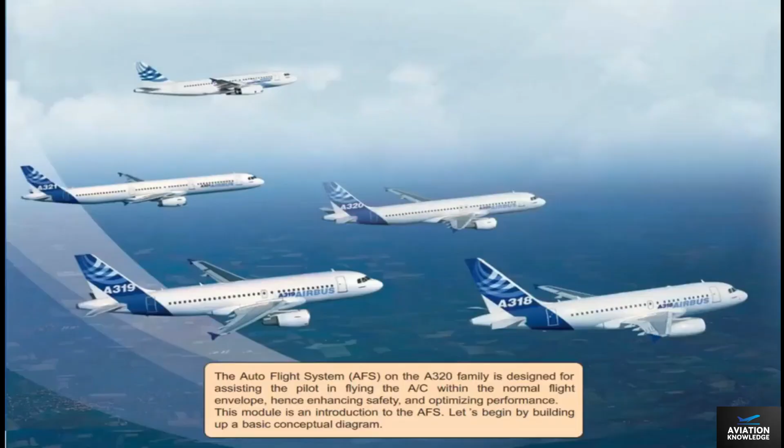The Auto Flight System, AFS, on the A320 family is designed for assisting the pilot in flying the aircraft within the normal flight envelope, hence enhancing safety and optimizing performance.

This module is an introduction to the AFS. Let's begin by building up a basic conceptual diagram.

The AFS could be represented as 4 main sections. At the heart of the system is a computation and processing section, the brain. The central processing section has access to several information sources. The pilots have access to the central processing section via input devices. Finally, after computation and processing, commands are provided to output devices.

For the AFS in the A320 family, computation and processing are done by 2 flight management guidance computers, FMGCs. The 2 FMGCs are identical and normally work together, so for training purposes we will group them as the Flight Management Guidance System, FMGS.

The FMGS receives navigation information, which contains details of airfields, nav aids, airways, routes, waypoints, procedures, SIDs, stars, approaches, missed approaches, etc. Aircraft performance information, the Air Data and Inertial Reference System, ADIRS, and the Global Positioning System, GPS, for position and dynamic information. You will learn about them in the navigation chapter. The clock, radio navigation information.

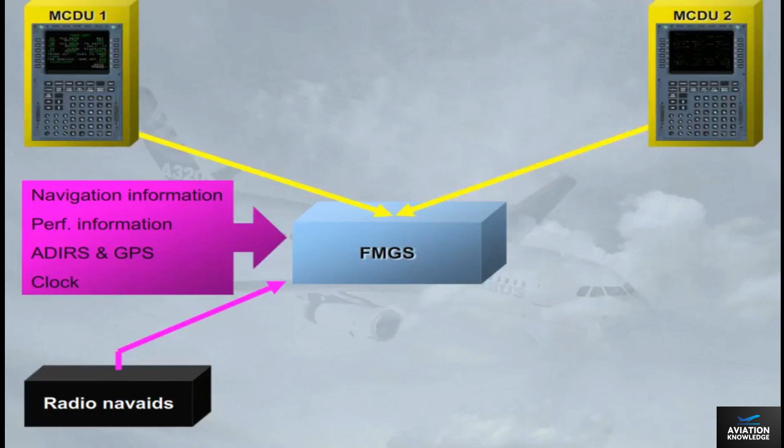The pilots provide inputs to the FMGS using 2 multipurpose control and display units, MCDU, for long-term interventions, and a single flight control unit, FCU, for short-term interventions.

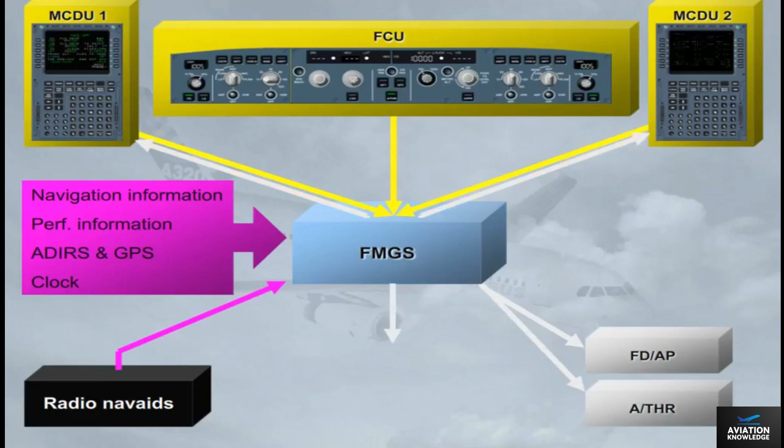The FMGS provide outputs to the flight directors, FDs, and autopilots, APs, for pitch, roll, and yaw control, the autothrust, ATHR, for thrust control, the MCDUs and EFIS for the display of information, and the navigation radios for the automatic tuning of radio aids.

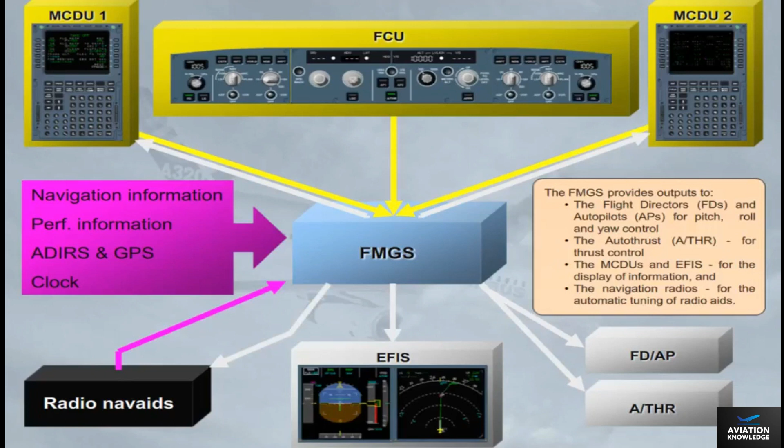The FMGS is divided into 3 main parts: flight management, flight guidance, flight augmentation.

The flight management part of the FMGS controls the following functions: navigation, the position of the aircraft and the estimated accuracy of this position; flight planning, the flight plan computation; performance optimization, costs, speeds, and altitude optimization.

Predictions, the accurate estimates for waypoints, altitudes, speeds, fuel, destinations, and alternates; display management, the control of information to the EFIS system to display auto flight modes and navigation information.

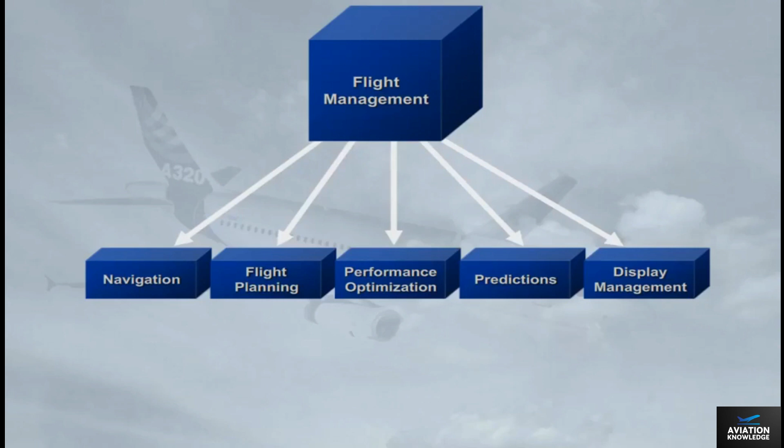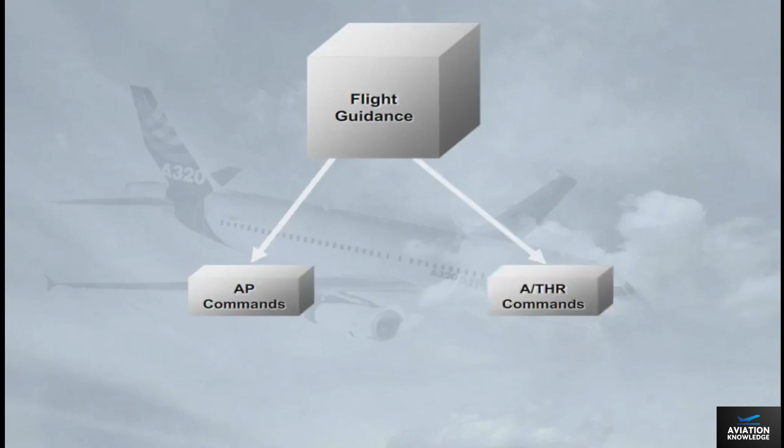The flight guidance part of the FMGS provides autopilot commands to automatically control pitch, roll, and yaw, auto thrust commands to automatically control thrust, flight director commands for the pilot to control the pitch, roll, and yaw.

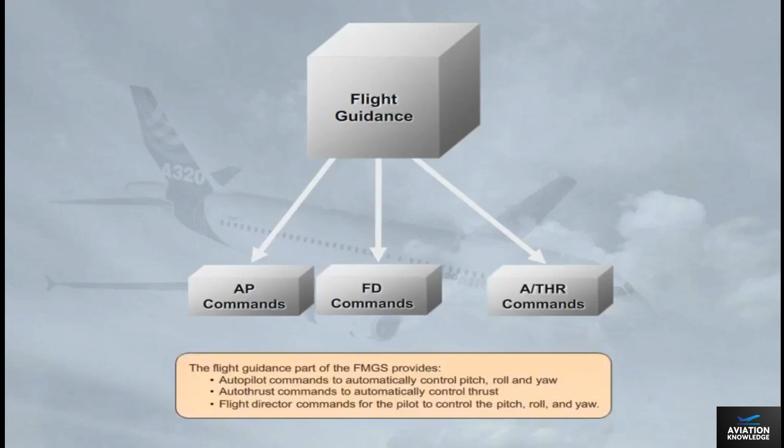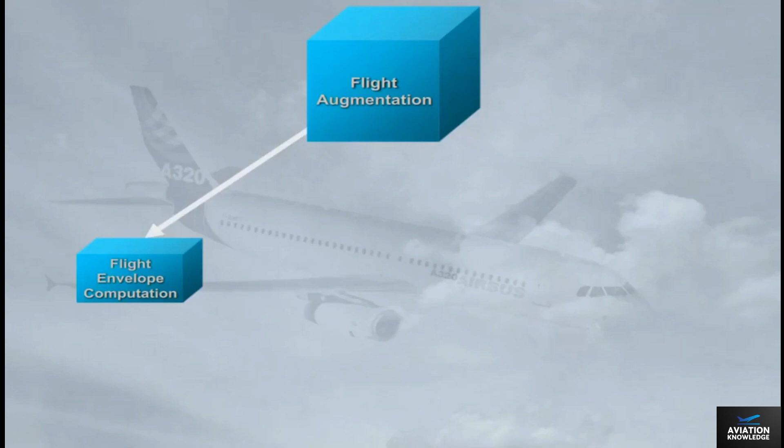The flight augmentation, FAC, part of the FMGS provides flight envelope computations, minimum speed, such as VLS, or maximum speed, such as VMO or VFE. Maneuvering speed computation, for example best speed to fly in a given flap configuration.

Wind shear detection, which triggers the wind shear warning. Angle of attack protection, alpha floor protection, triggered when the aircraft's angle of attack is above a predetermined threshold.

Note, the FAC has various yaw functions, such as yaw damping, turn coordination, and others which will be reviewed in the Flight Controls chapter.

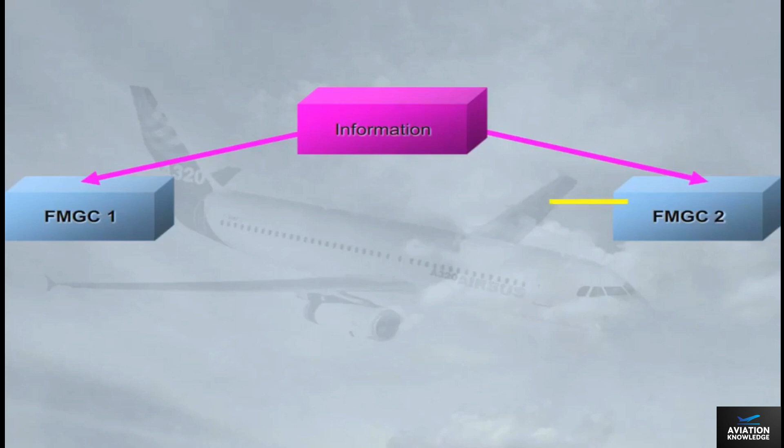As a general rule, the two FMGCs have access to information provided by onside sensors, except for certain parameters or in case of failures. They exchange information for validity comparison purposes.

For example, information from MCDU-1 is received by FMGC-1 and transmitted to FMGC-2. All FMGCs and MCDUs are then synchronized.

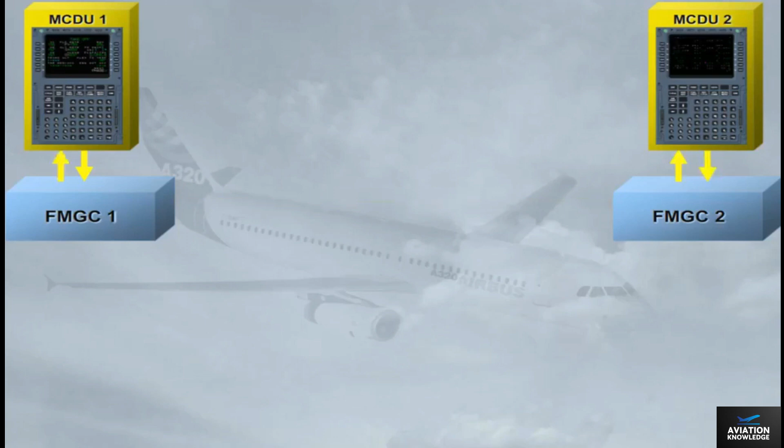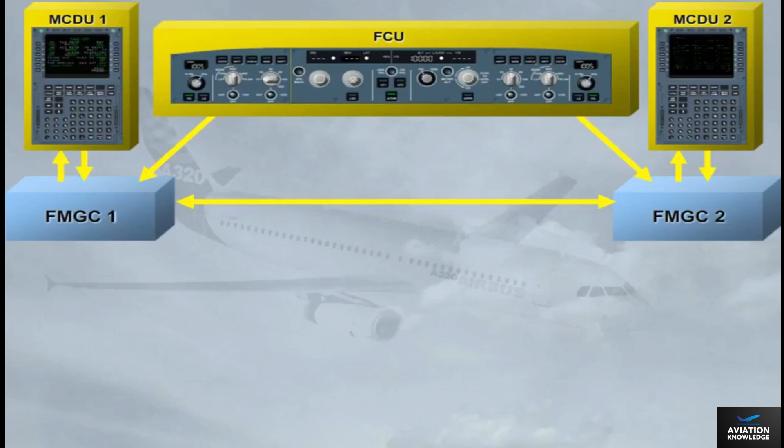The inputs from the FCU are fed to both FMGCs. Both FMGCs send their commands to the FDs, the autopilots, and the autothrust system.

According to a given internal logic, one FMGC is declared master. E.g., if autopilot 1 is on, FMGC 1 is master. Amongst other things, this determines which autothrust channel is operative.

The controls and indicators found in the cockpit are: 1 Flight Control Unit, FCU; 2 FD push buttons installed on the EFIS control panels and the associated EFIS displays; 2 multi-purpose control and display units, MCDU; 2 thrust levers, mainly an interface with auto thrust.

You have just reviewed the overall presentation of the autoflight system. In the next modules, we will review each component in more detail.

The Flight Control Unit, or FCU, is the short-term actions interface with the FMGS. It is used to arm or engage the guidance modes and to select their associated targets. It is also used to set the autopilots, APs, and/or autothrust, ATHR, on.

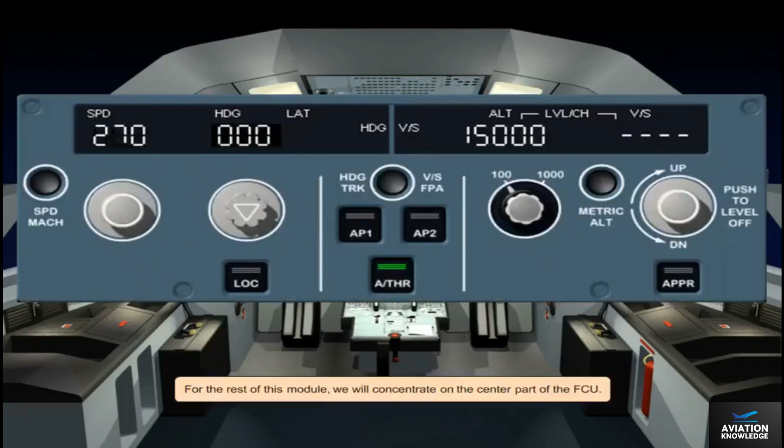The pilot uses the FCU to select targets and arm or engage their related modes for speed Mach, for lateral guidance, for example heading, for vertical guidance, for example vertical speed. The pilot also uses it to set the autopilots and autothrust to on.

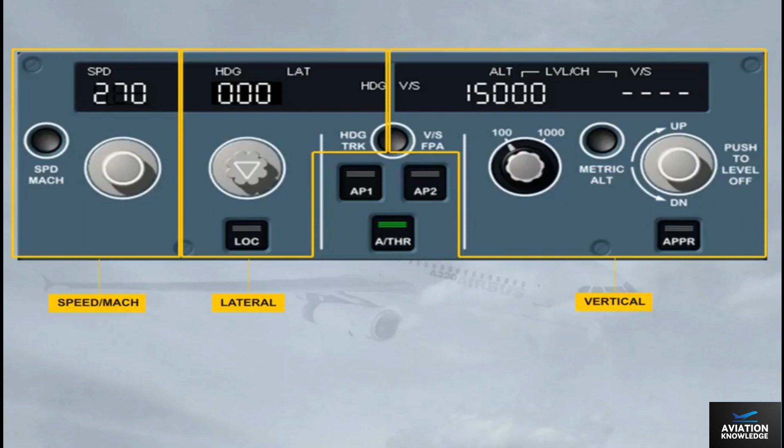We can find, in the control areas, 4 selector knobs and their associated windows, as well as 2 mode engagement push buttons. As an option, a third one can be installed.

As a general rule, if you turn a selector knob, you select a guidance target. If you then pull the same knob, you engage a mode which will guide the aircraft to the selected target. Such a mode is a selected mode. The selected target is clearly displayed on the associated window and on the associated PFD scale using a blue target symbol.

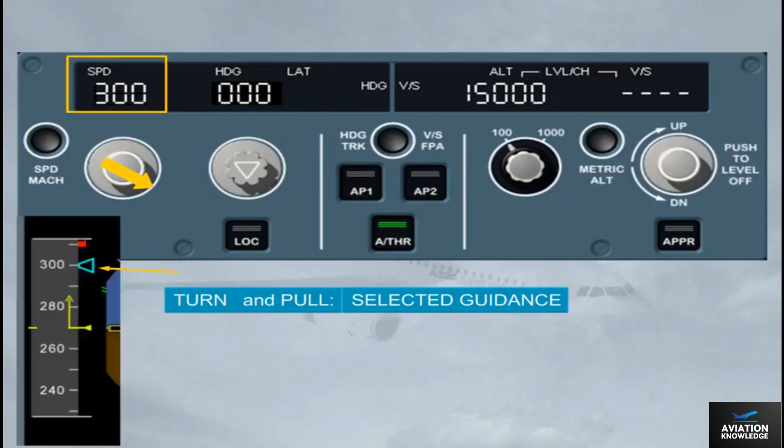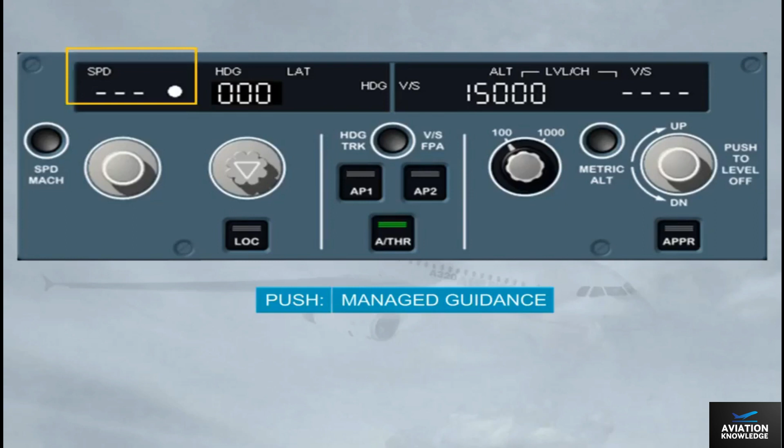On the other hand, if you push a selector knob, you arm or engage a mode which will guide the aircraft to a target managed by the FMGS. Such a mode is a managed mode. In this case, the associated window, except the altitude one, displays dashes with a white dot.

Let's now have a closer look at the Speed Mach section. The Speed Mach selector knob enables you to select the target speed for the autopilot or auto thrust. This selection is done by turning the selector knob. The selected speed is then displayed on the window.

By pulling the speed knob, you engage the selected speed mode for the autopilot and/or auto thrust, which will guide the aircraft to the selected speed target.

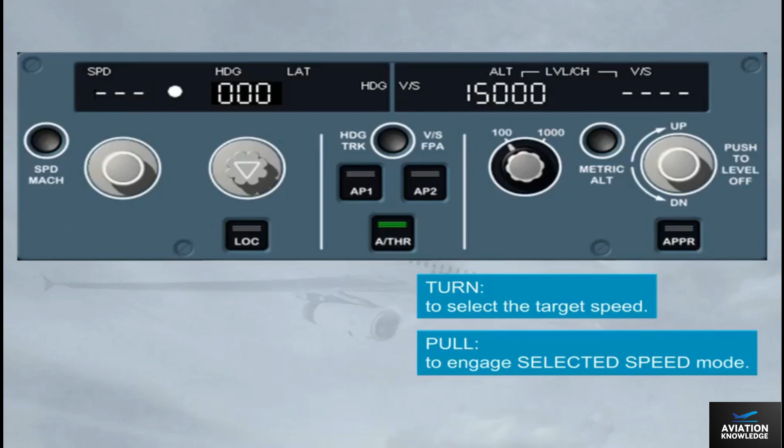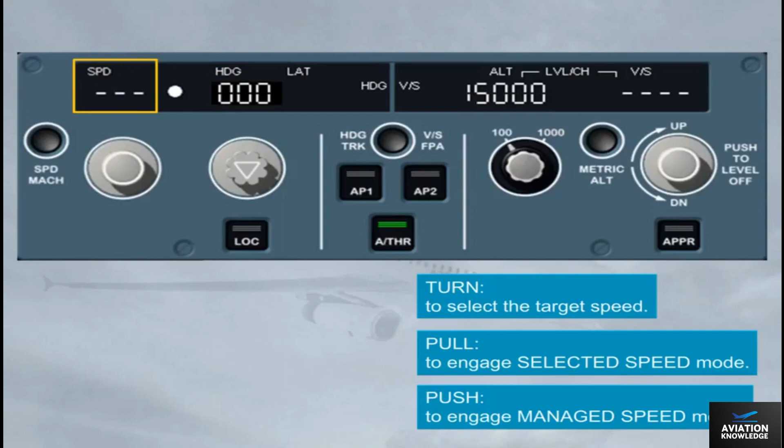By pushing the speed knob, you engage the managed speed mode for autopilot and/or auto thrust. This will guide the aircraft to the managed speed target profile as computed by the FM. The speed window displays, in this case, dashes as well as an illuminated white managed speed Mach dot.

The selection in the speed window can either be a speed or a Mach. In normal operation, the change from speed to Mach target occurs automatically in climb at around flight level 300 and vice versa in descent. However, you can toggle the selected target between speed and Mach by pushing the Speed Mach push button on the FCU at any time. The current selection is clearly indicated by a speed or Mach legend on the display.

That is all for the Speed Mach area. Let's now learn more about the lateral area.

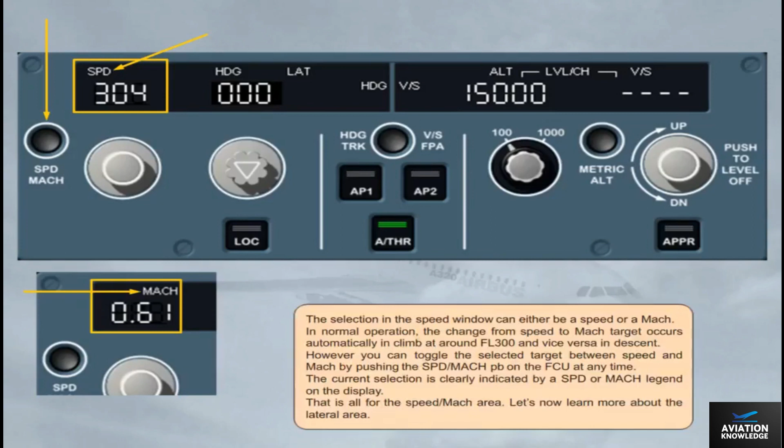Like the speed selector, the heading track can be turned, pulled, or pushed. By turning it, you select a heading or track target. We will see later on how to toggle between heading and track.

By pulling it, you engage the selected heading or track mode for the autopilot flight director. By pushing it, you engage the managed navigation mode for the autopilot flight director, which will guide the aircraft along the active leg of the primary flight plan. In this case, the window displays dashes as well as an illuminated white managed lateral dot.

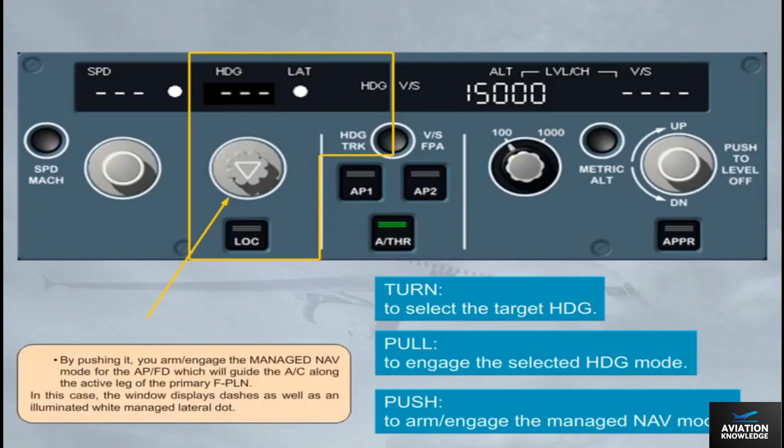The heading, vertical speed, track, flight path angle push button is used for the display of flight path vector, FPV, or bird on or off the PFD. When the bird is on, your flight reference is the flight path vector, the aircraft trajectory. When the bird is off, your flight reference is the attitude of the aircraft.

The consequence for the autopilot flight director is that you change their basic guidance references from track, flight path angle, bird on, to heading, vertical speed, bird off.

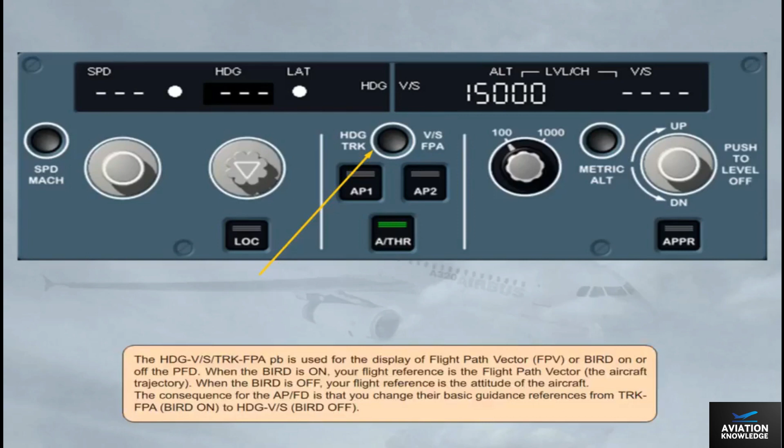The flight reference selected here is attitude, bird off. The aircraft attitude symbol is your flight reference, and if the flight director is on, the flight director crossbars are displayed. The selection is also indicated by heading vertical speed legends on the FCU display.

Change the reference.

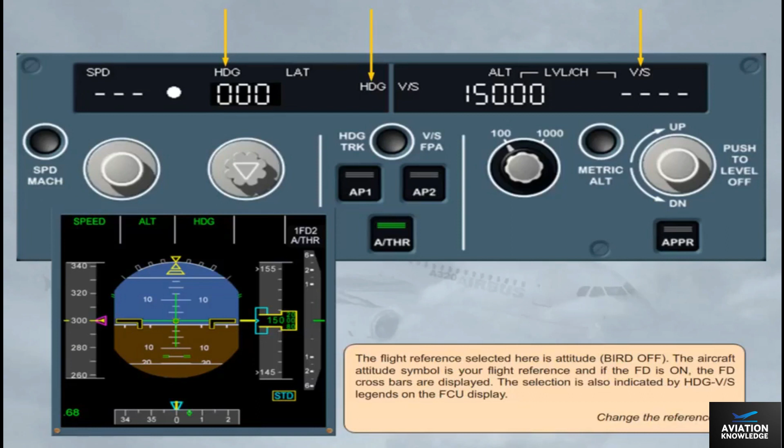The selected flight reference is now the flight path vector, bird on. The bird symbol is your flight reference and materializes the aircraft current trajectory. If the flight director is on, the flight director flight path director, FPD, is displayed. The selection is now indicated by track flight path angle legends on the FCU display.

The vertical area is divided into two parts. The first one relates to the altitude. The second one relates to vertical speed or flight path angle guidance modes.

The altitude window is never dashed. It always displays the target altitude, which is systematically selected by the crew as the next applicable clearance altitude.

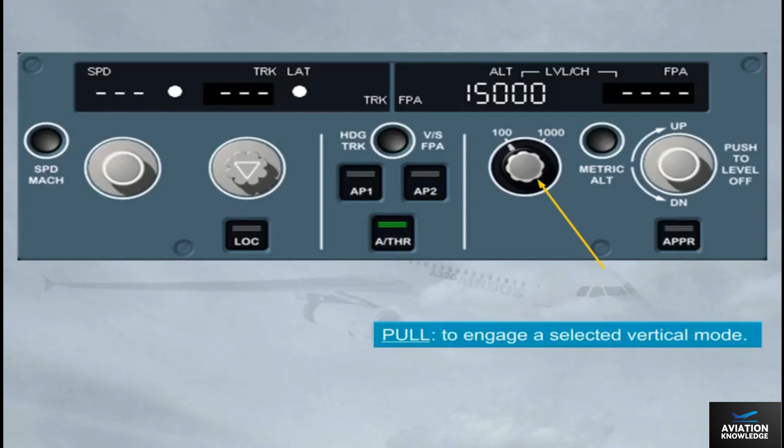This knob can also be pulled or pushed. By pulling it, you engage a selected vertical mode. It will guide the aircraft towards the FCU selected target altitude, while disregarding any altitude constraints of the vertical flight plan.

By pushing it, you engage a managed vertical mode. It will guide the aircraft towards the FCU selected target altitude, matching all altitude constraints of the vertical flight plan, and along the pre-computed descent path. The white level change light comes on. Note: managed vertical mode can be engaged if the lateral profile is already managed.

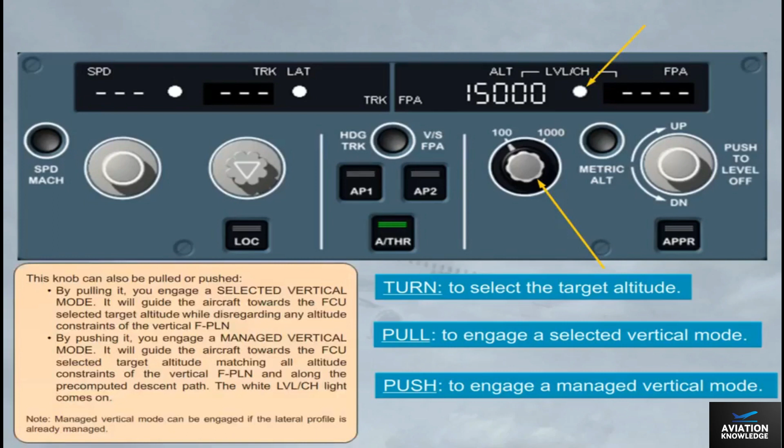This knob is actually two different selectors. The inner selector sets the altitude target in the window, and an outer ring changes the altitude increments. The increment-decrement of the altitude can have two settings, 100 feet or 1,000 feet.

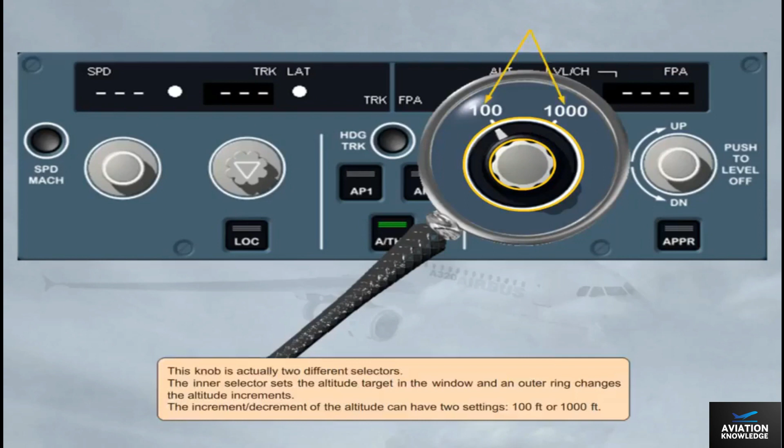The metric altitude push button is also part of the altitude area. It has been already seen in the EIS chapter. We just remind you that this push button is used to display the selected altitude, written in meters, on the permanent data display area at the bottom of the ECAM system display, SD.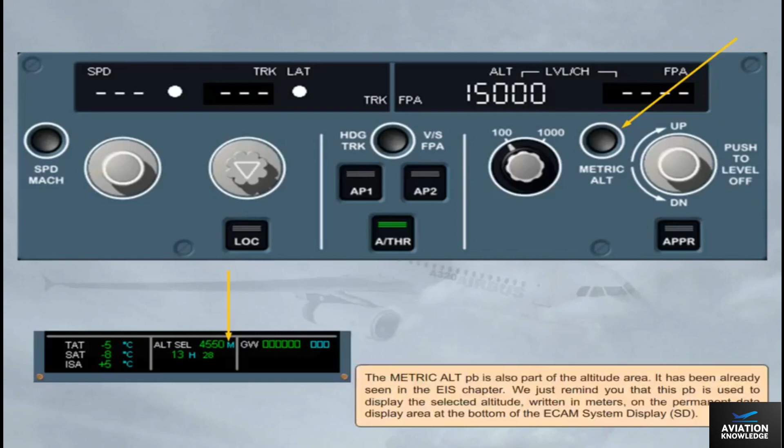Let's now have a look at the vertical speed flight path angle part. Here again, the vertical speed flight path angle selector knob has three functions. The first two are similar to what we've already seen.

The turn function enables you to select a target vertical speed or flight path angle. The pull function enables you to engage the selected vertical speed or flight path angle mode. The third function, push, differs from the other push functions.

When you push the selector knob, the FG commands an immediate level off, vertical speed or flight path angle equals 0. The value 0 is then displayed in the window as well as on the FMA.

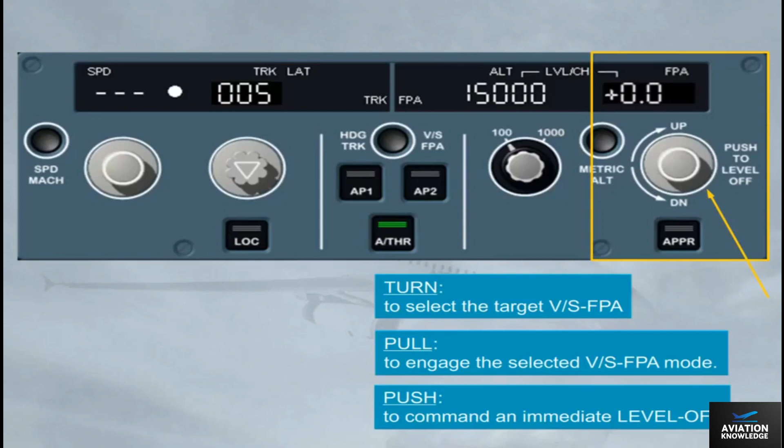To set a value, let's first turn the vertical speed flight path angle selector knob.

As soon as the vertical speed flight path angle selector knob is turned, the vertical speed flight path angle window indicates the current flight path angle or vertical speed. In this case, a flight path angle value is displayed.

Notice how the degrees are displayed. The minus sign indicates a descent. A climb would be indicated by a plus sign.

To engage the Autopilot Flight Director Flight Path Angle Selected mode, we have pulled the selector knob for you. For training purposes, we wish to change the flight reference, and thus select the bird off, changing the basic Autopilot Flight Director guidance references from flight path angle to vertical speed.

Switch back to heading vertical speed. The vertical speed window is now showing a vertical speed target, minus 800 feet per minute, synchronized with the current vertical speed. Notice how the vertical speed is displayed and the change of labels from flight path angle to vertical speed.

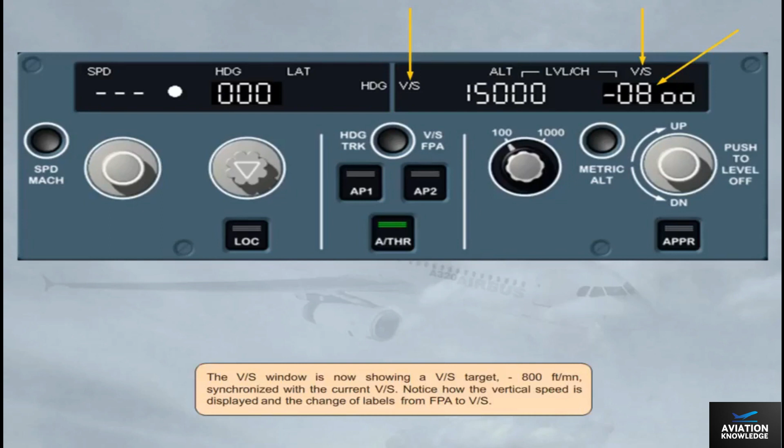The vertical speed flight path angle window can also display dashes if a vertical managed mode is engaged. This case will be seen and explained later in the course.

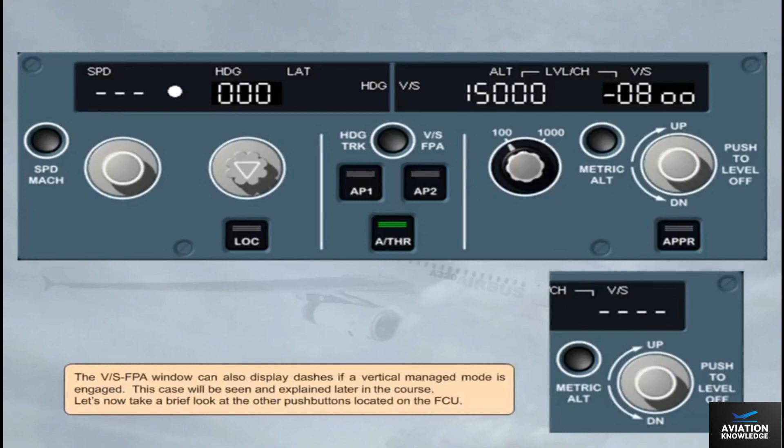Let's now take a brief look at the other push buttons located on the FCU. The LOC push button arms, engages the localizer mode, in case the aircraft is cleared to intercept the localizer only, or in case of a localizer-only approach.

When LOC mode is armed or engaged, the green lights on the push button are illuminated. You will see this function in more detail during your free play and simulator sessions.

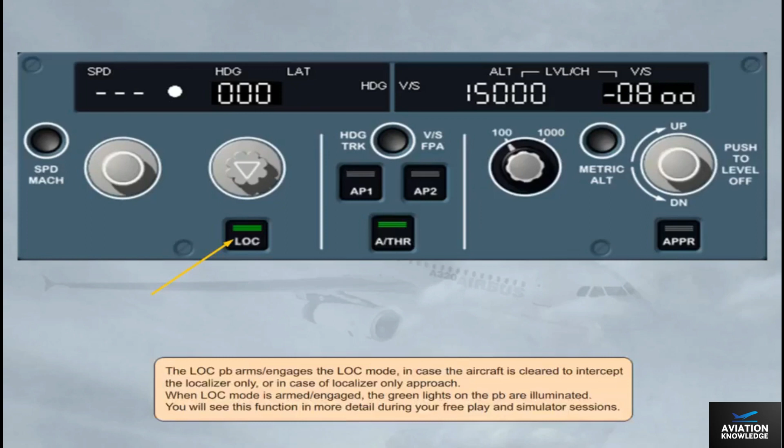The pilot uses the approach push button to arm or engage the approach modes, depending upon the approach type selected in the FM's flight plan. When engaged, green lights come on the push button.

If installed, the Expedite push button allows you to temporarily expedite the climb or descent towards the altitude selected on the FCU. The target speed is then automatically set to the best climb or descent speed in order to achieve that goal. When selected, green lights come on the push button.

Autopilot 1, Autopilot 2 push buttons set Autopilot 1 and/or Autopilot 2 to on. Autothrust push button sets Autothrust to on.

The push button illuminates green when autothrust is on or when it is armed. See autothrust logic, e.g., as soon as takeoff power is applied.

We will come back to these controls in a later module. Note, these push buttons may also be used for APs and/or autothrust setting to off, but in normal operation, this is not the recommended disconnection procedure.

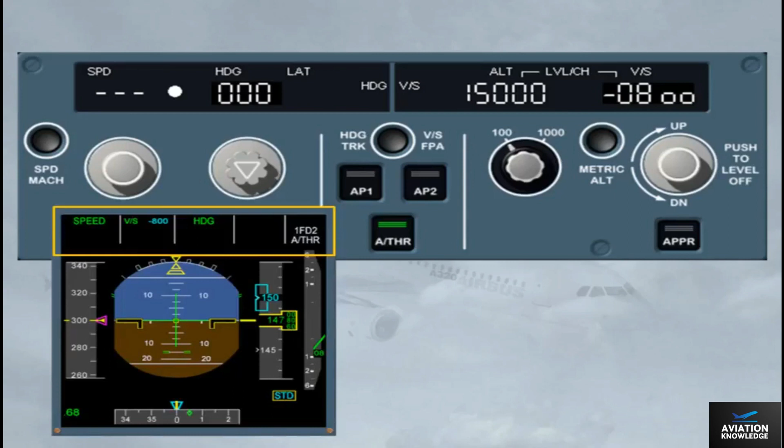You have now seen an overview of the FCU. The FCU is basically a selector panel with various functions. Remember that one of our golden rules is know your FMA at all times, which means that any new selection made on the FCU should be confirmed on the FMA located on the PFD.

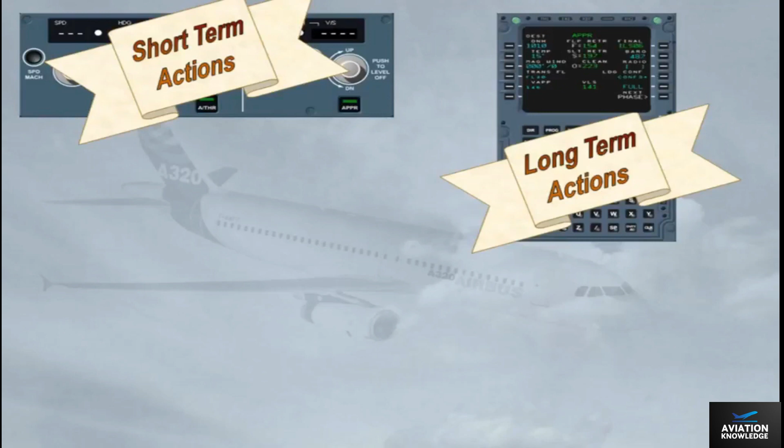Long-term actions through the MCDU and short-term actions through the FCU must be cross-checked on the Flight Mode Annunciator, FMA, located at the top of the PFD, as well as on the various scales of the PFD. The guidance mode engagement, arm status, and their associated guidance targets are provided on the FMA and PFD scales: speed, heading, altitude.

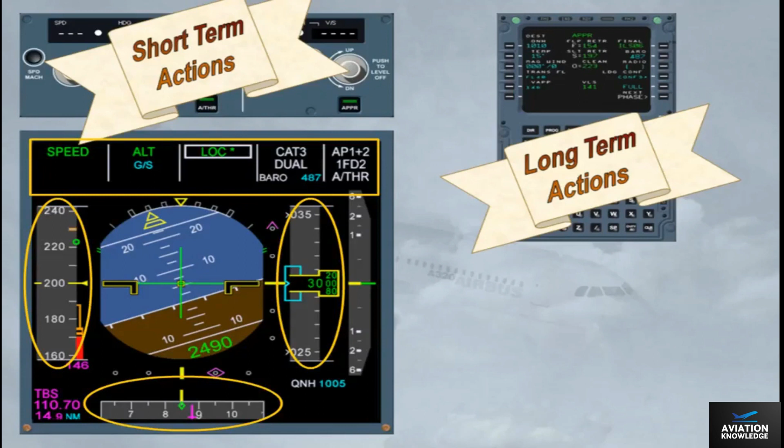When managed by the FMGS, the targets and modes are displayed on the FMA as the flight progresses. Let's discuss the FMA in more detail. As you can see, the FMA is divided into 5 columns.

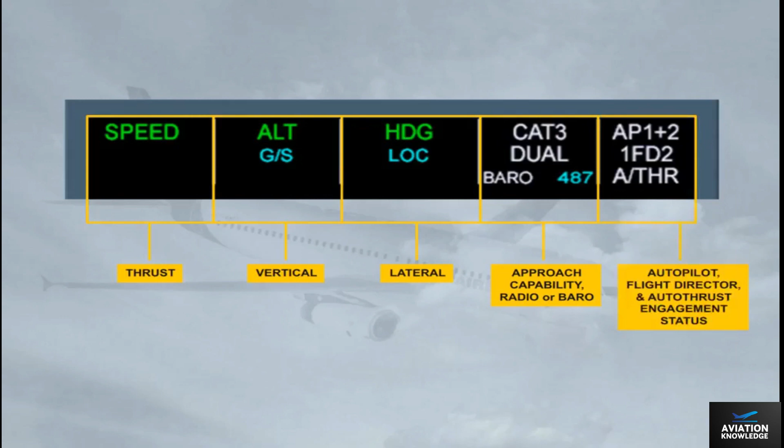The first column is dedicated to thrust; this is where the auto-thrust modes appear. The second one displays the vertical modes of the autopilot and flight directors. The third one, the lateral modes of the autopilot and flight directors. The fourth one gives the approach capability of the auto flight system and the radio or baro, with the related value as entered on the MCDU performance page. The last column displays the engagement status of the autopilots, flight directors and auto-thrust systems.

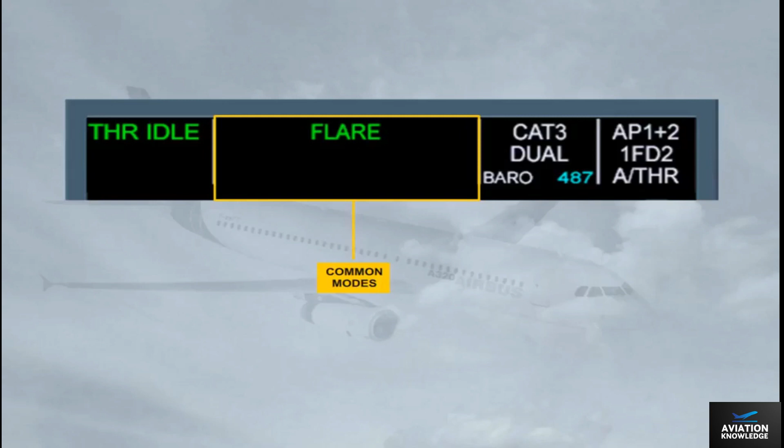In certain cases, the second and third columns are combined to display a single autopilot flight director mode, which is common laterally and vertically. These modes are common modes for approach, which means that they are closely linked together. You will study all the modes in later modules.

The FMA can display 3 lines in each column. Let's look at the first 3 columns. The first line shows the engaged modes to the flight guidance system. In our example, the speed mode is engaged for the autothrust. This means that the autothrust will manage the thrust to track the target speed.

The altitude, ALT mode, is engaged for the vertical mode. This means the autopilot FDs will provide guidance to maintain altitude. The heading, HDG mode, is engaged for the lateral mode. This means the autopilot FDs will provide guidance to the selected heading. Note: the color coding will be explained later when the concept of managed guidance and selected guidance will be discussed.

The second line shows armed modes for the flight guidance system. In the example shown, GS and LOC in blue indicate that glide slope and localizer capture modes are armed. The third line shows reminders or messages and can be spread over one column or two columns.

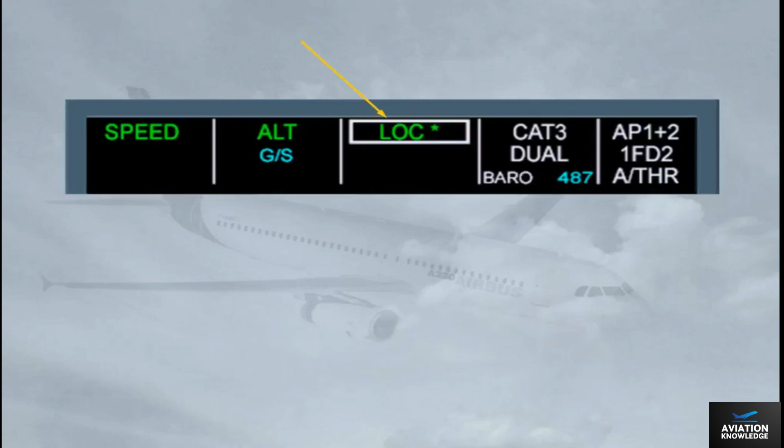When any mode changes on the FMA, it is boxed for a few seconds to draw the pilot's attention to this new status. In our example, the aircraft is intercepting the localizer. The star, after the LOC indication, means that the aircraft is in the capture phase. Once established on the localizer, the indication becomes LOC. Notice that the glide slope is still armed.

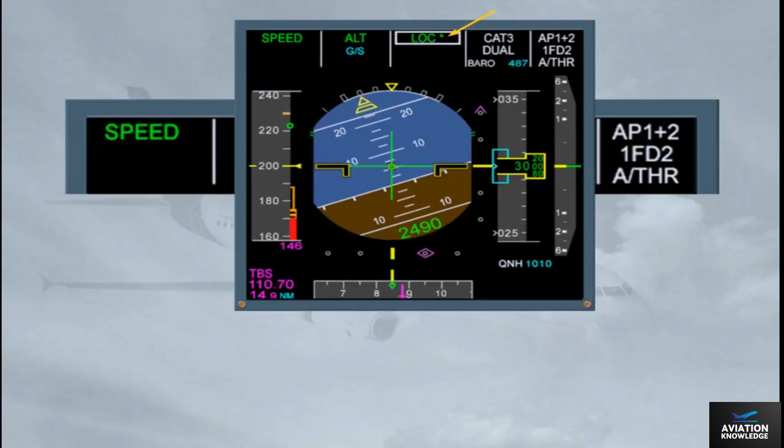We will be learning more and more about the FMA in the following modules, as we are constantly using it during all autoflight operations.

In this module, we will review how to turn the autopilots and/or the FDs on. First, let us review how to engage the autopilot. Autopilot on. You are the captain and pilot flying.

The autopilot is an assistance to the pilot to fly the aircraft. The autopilot works within the aircraft normal flight envelope. Therefore, the pilot can turn it on whenever the aircraft is within this flight envelope. Here, we are just airborne, above 100 feet from the ground.

Engage Autopilot 1. The FMA confirms the engagement of Autopilot 1. As a general rule, when the captain is pilot flying, Autopilot 1 is used. When the first officer is pilot flying, Autopilot 2 is used. This ensures that each autopilot will be alternatively operated.

The autopilot can be used just after liftoff from, say, 100 feet until the end of the landing rollout. In most cases, only one autopilot can be engaged at a time. However, in case of an ILS automatic approach, both autopilots may be turned on at the same time. This ensures the best level of redundancy required to safely achieve auto lands, auto rollouts, or low-altitude go-arounds.

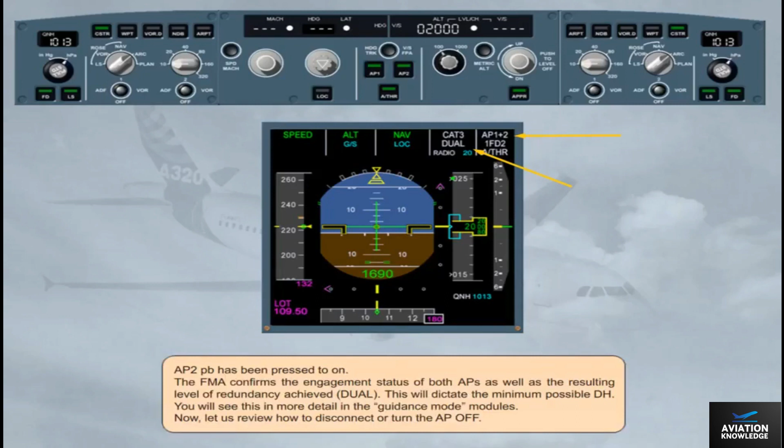Now, let us review how to disconnect or turn the autopilot off. You are now flying an automatic approach. When in sight of the runway, you decide to take over manually. To turn the autopilot off, you press the red Autopilot Disconnect push button, also known as Takeover push button, located on either side stick.

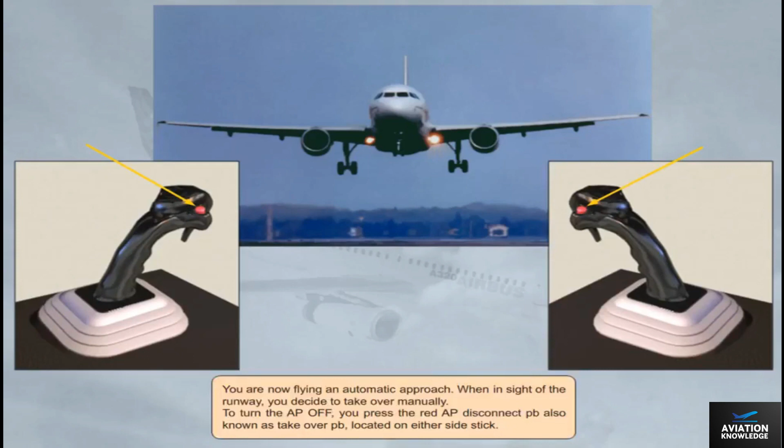The weather is fine. You are number 1 for approach. Disconnect the autopilot.

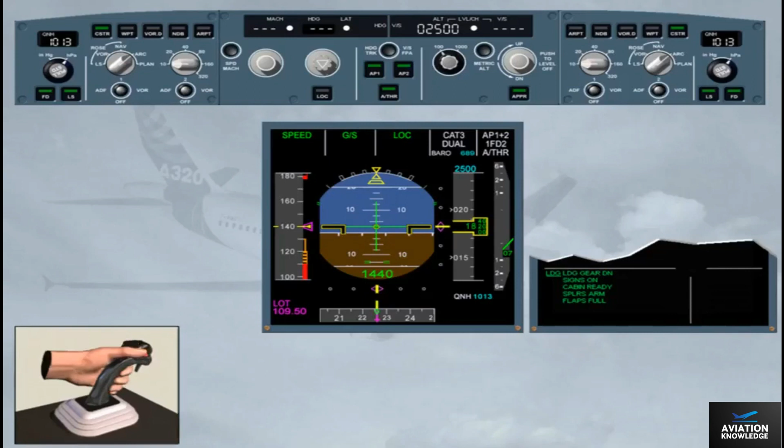Turning an autopilot off via the takeover push button triggers temporary warnings: a cavalry charge for around 1 second, the master warning flashing for several seconds, and an autopilot off red message on the right column of the engine warning display for several seconds.

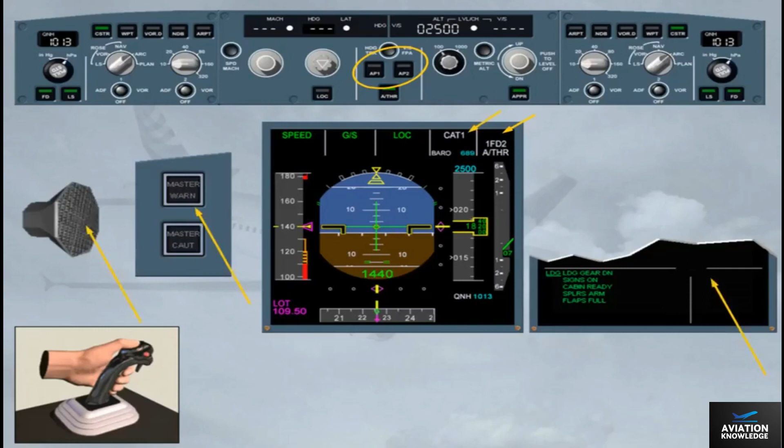By pressing the takeover push button again, you cancel all these warnings immediately. Notice on the FCU that the autopilot's lights are extinguished. On the FMA, Autopilot 1 plus 2 is no longer displayed. The approach capability is downgraded to Cat 1, and on the ECAM system, all warnings are now off.

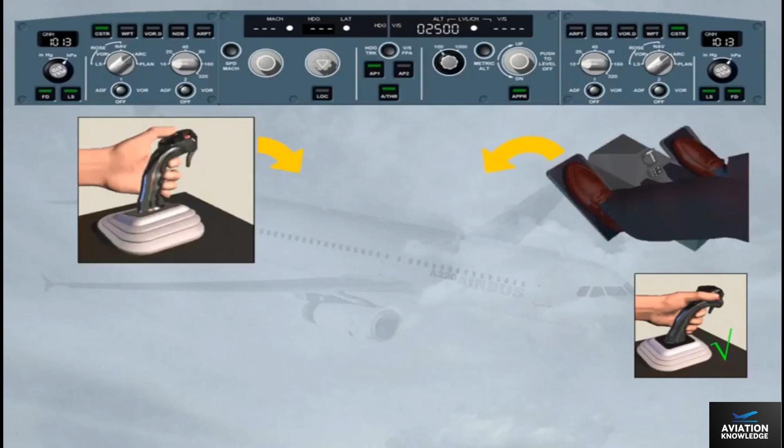The recommended technique to set autopilots off is to press the autopilot disconnect push button on a side stick. They can also be set off by acting on the side stick or rudder pedals with a force beyond a given threshold, or by pressing an autopilot push button on the FCU when the corresponding autopilot is on. These last two actions lead to a repetitive cavalry charge, a permanent activation of the master warning, and a permanent red autopilot off warning on the left column of the engine warning display. This is considered by the flight guidance as an involuntary autopilot disconnection.

The FG also drives the Flight Director FD symbols displayed on either PFD. The Flight Director is an assistance provided to pilots to accurately hand-fly the aircraft along a given segment of a trajectory. The Flight Director provides guidance orders to the pilots as a function of the guidance modes and targets selected on the FCU. These orders are materialized by specific symbols, e.g. crossbars.

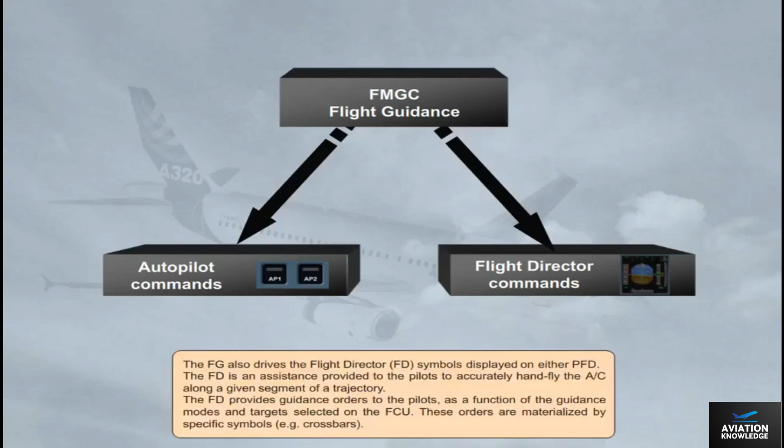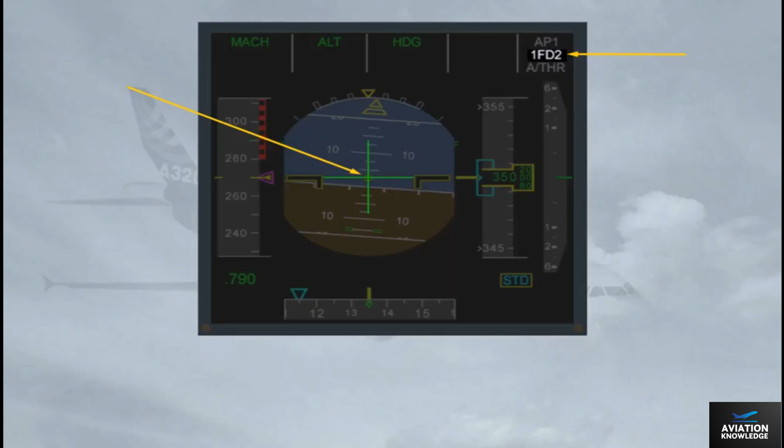The Flight Director symbols are displayed on either PFD. The symbols on PFD1 are driven by FG1, those on PFD2 are driven by FG2. The engagement status of the Flight Director is indicated on the FMA. Here the Flight Director symbols are called crossbars and are referenced to the aircraft attitude symbol.

To turn the Flight Director on or off, use the Flight Director push button located on either EFIS control panel. When a Flight Director is on, the green bars of the corresponding push button are illuminated. Here both FDs are on. Let's turn them off.

Each pilot presses his Flight Director push button. Flight Director bars are removed from the PFD. Flight Director engagement status is cleared on the FMA. Flight Director push button green lights are extinguished.

Note that we have switched the Autopilot 1 off for you. When both autopilots and FDs are off, note that all mode fields, except the one of the autothrust, here Mach, are blank on the FMA. It is important to notice that if both FDs are set to off, while autopilots are off, autothrust, if active, is automatically in speed mode or Mach mode.

Let's now turn the FDs back on. Suppose that the captain presses his flight director push button first, and then the first officer. Flight Director 1 is on. The crossbars are displayed on PFD 1. The FMA on both PFDs indicates 1 Flight Director as Flight Director Engagement Status, meaning that only Flight Director 1 is on, showing the Flight Director 1 associated modes.

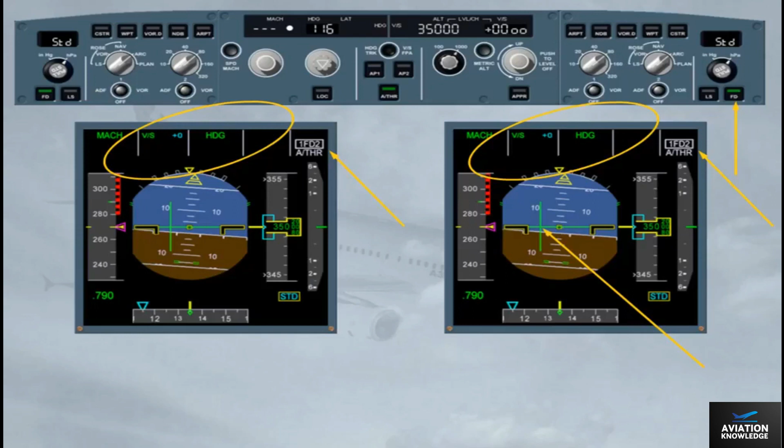Both FDs are now on. The crossbars are displayed on PFD 2. Both FMAs indicate 1 Flight Director 2 as Flight Director Engagement Status, meaning that both FDs are on, showing the on-side Flight Director Guidance modes. Note that Flight Director 2 push button illuminates in green on the EFIS control panel. As a general rule, it is strongly recommended to set both FDs on or off at the same time.

Let's review the flight director symbols. The flight director crossbars are two independent bars, referring to the aircraft attitude symbol: a horizontal bar indicating the pitch command, and a vertical bar indicating the roll command. The roll bar is replaced by a yaw bar index for takeoff and landing roll-out functions from an ILS-equipped runway. The yaw bar helps the pilot properly track the localizer on ground while in low visibility conditions.

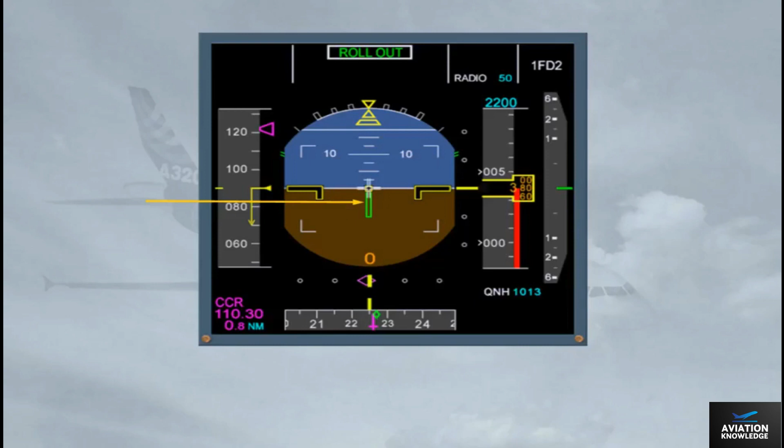The principle of the Flight Director crossbars has been reviewed in the EFIS module. Let's review another Flight Director symbology. We have seen the Flight Director crossbar symbology, referring to the aircraft attitude symbol. The other Flight Director symbology refers to the flight path vector, FPV or bird. The bird can be displayed on or off on the PFD by pressing the heading, vertical speed, track, flight path angle push button on the FCU. Click on the heading vertical speed track flight path angle push button.

Notice that on the PFD, the bird is now displayed. On the FCU, the indications have been modified to reflect the change to track flight path angle. Let's have a closer look at the PFD.

The flight path vector, FPV, is displayed. The crossbars are removed and replaced by the flight path director, FPD, referenced to the flight path vector.

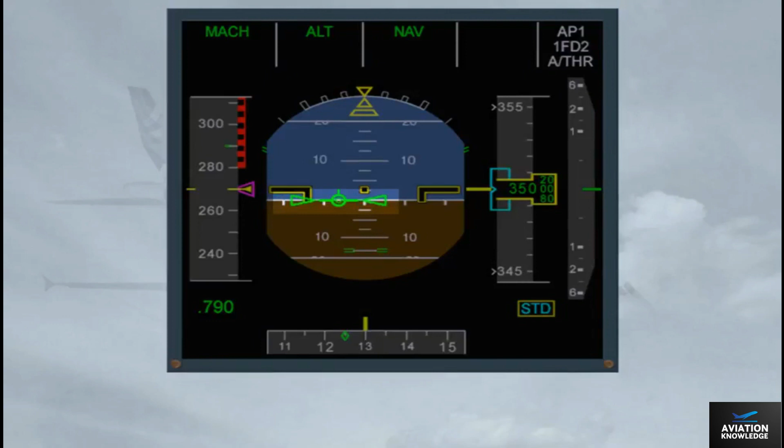In case flight director bars are displayed and the guidance modes are vertical speed and/or heading, these modes are automatically changed to track flight path angle if you select the bird on. Have a look while we do this for you.

First, check that flight path vector is displayed. You can see that the mode changes are outlined on the FMA with white boxes. Notice also that the heading target has been changed to a properly synchronized track target.

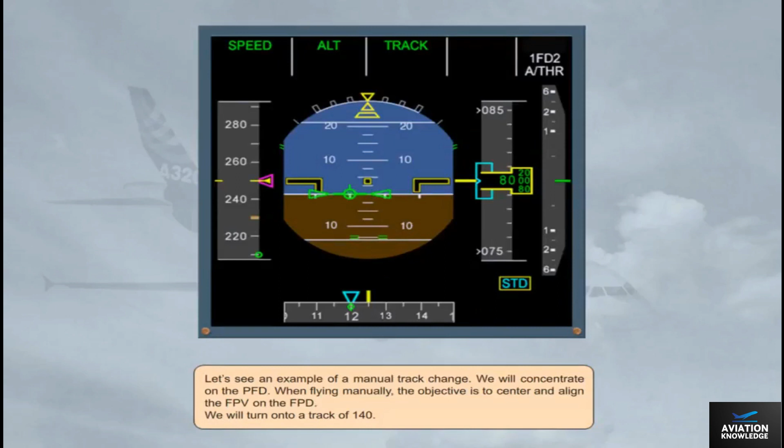Let's see an example of a manual track change. We will concentrate on the PFD. When flying manually, the objective is to center and align the flight path vector on the FPD. We will turn onto a track of 140.

The FPD commands a roll to turn onto the selected track. The aircraft is rolled until the flight path vector and FPD are aligned. Approaching track 140, the FPD demands a roll to level the wings.

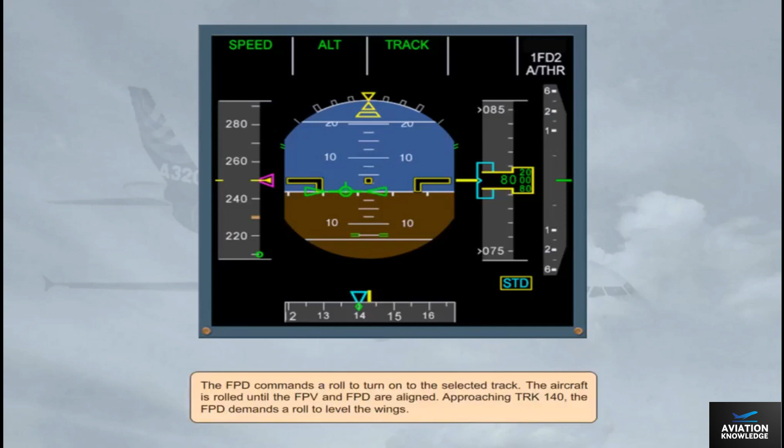When in track flight path angle, the FPD reverts to flight director bars in case of go-around. You will practice the use of the flight path vector and the FPD in the simulator.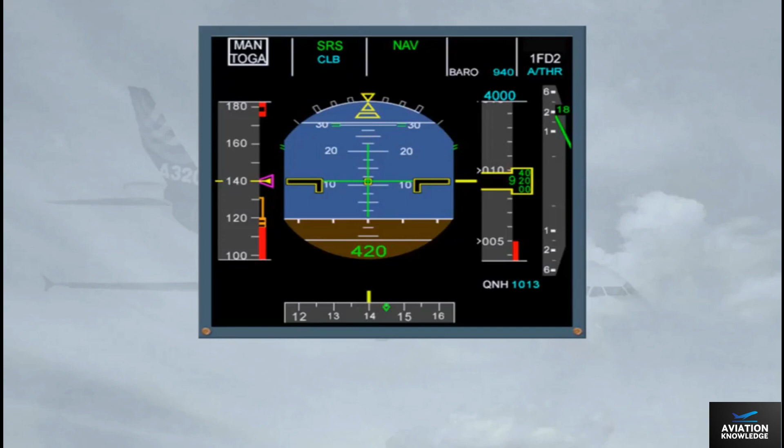We will now look at how the flight guidance achieves its automatic thrust control function, the auto thrust system, or auto thrust.

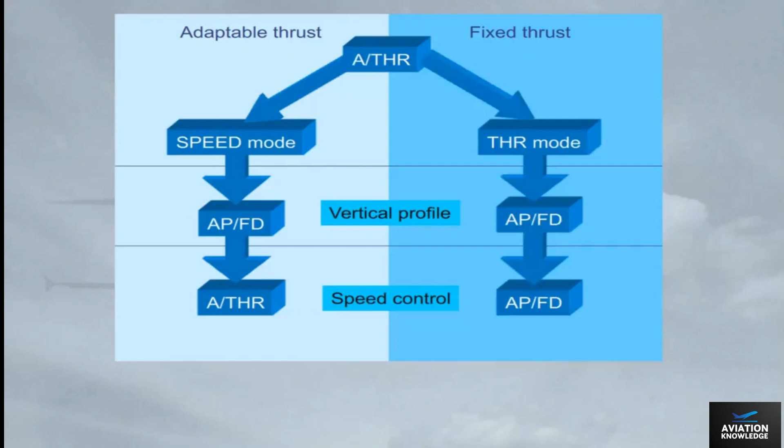The auto thrust can work in two different modes. Speed mode: the auto thrust continuously adjusts the thrust in order to maintain a target speed or Mach, e.g. during cruise or approach. Thrust mode: the auto thrust sets a given thrust, e.g. max climb or idle.

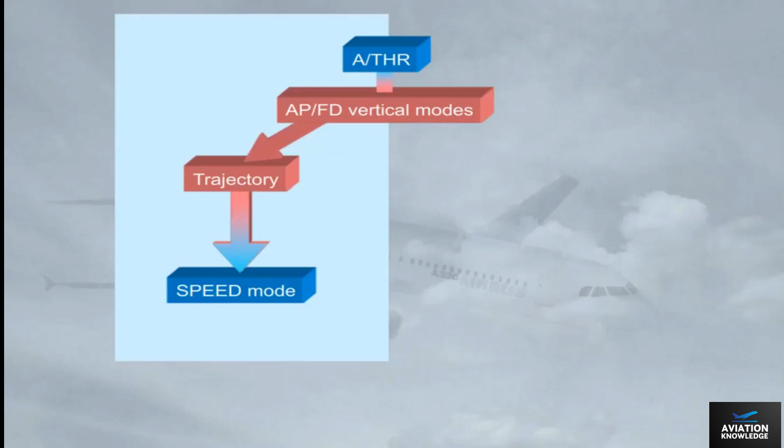The auto thrust modes are automatically linked to autopilot flight director vertical modes. When autopilot flight director vertical mode controls a trajectory, e.g. altitude hold, vertical speed, glide slope, the auto thrust is in speed mode. When autopilot flight director vertical mode adjusts the aircraft pitch in order to keep a target speed or Mach, e.g. climb, descent, the auto thrust is in thrust mode.

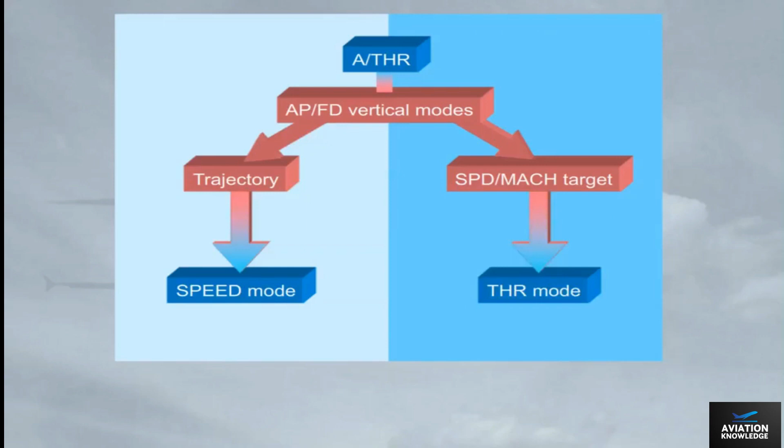The main auto thrust controls available for the pilots are the thrust levers. On the Airbus fly-by-wire family, the auto thrust does not back drive the thrust levers while it adjusts the thrust. Let's have a closer look at them.

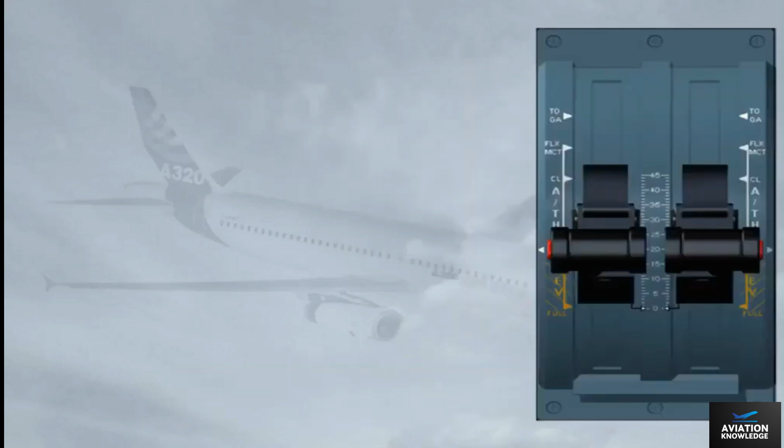When the auto thrust is off, the crew controls the thrust as usual by moving the thrust levers over a quadrant. For forward thrust, this quadrant carries 4 physical detents or stops, which are idle, climb for max climb thrust, flex MCT for flex thrust at takeoff or max continuous thrust, toga for max takeoff or go around thrust.

The auto thrust can only work when the thrust levers are set forward of the idle detent and up to the climb detent, or MCT detent in case of engine failure. If the thrust levers are set by the pilot in the reverse position, the auto thrust cannot operate. Note, the alpha floor function is an exception which will be covered later on.

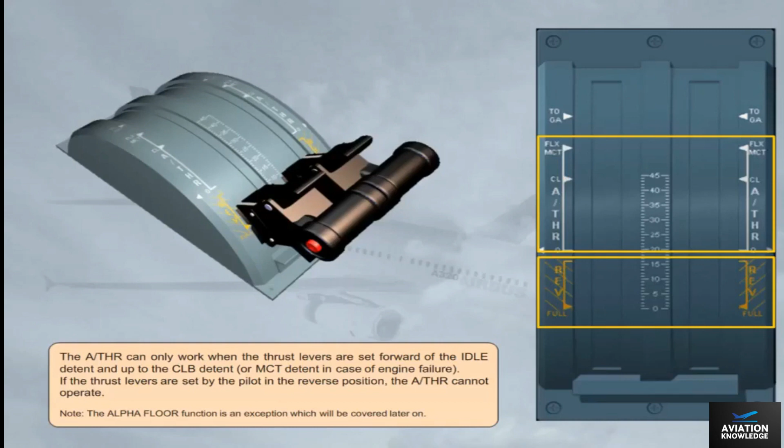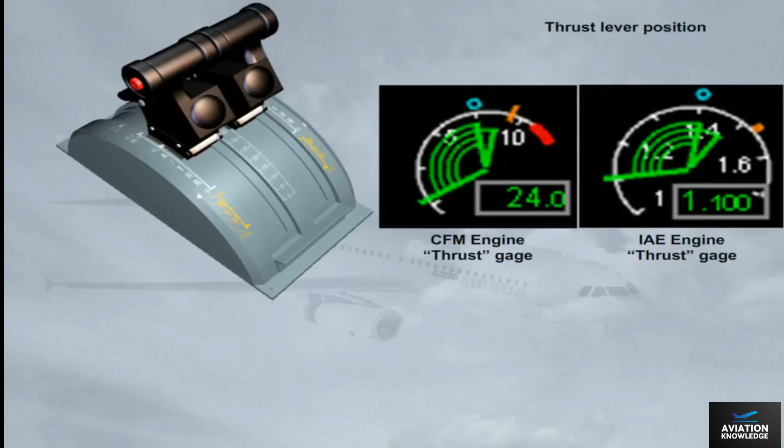When auto thrust is on, the thrust lever position determines the maximum thrust which can be commanded by the auto thrust, for example, to accelerate in speed mode. On the thrust gauge, which we will be talking about in the engine chapter, the thrust lever position is indicated by a symbol. It materializes the maximum thrust available for the auto thrust in normal operation.

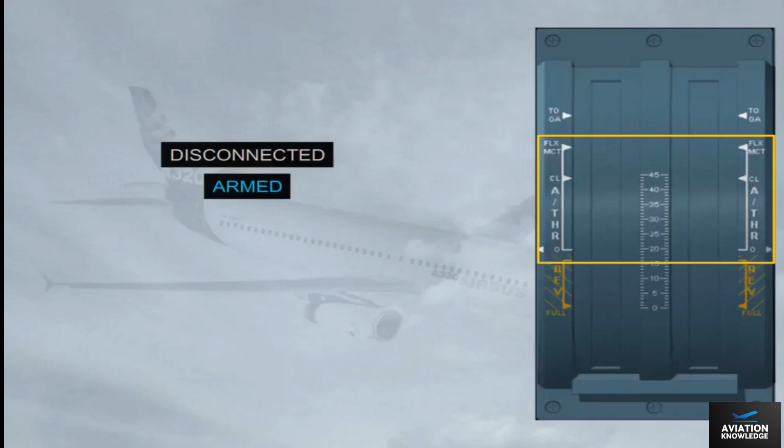The auto thrust has 3 states. It can be either disconnected or off, armed, ready to be set to on by a specific pilot action on the thrust levers, or active/on. Let's see these states in more detail.

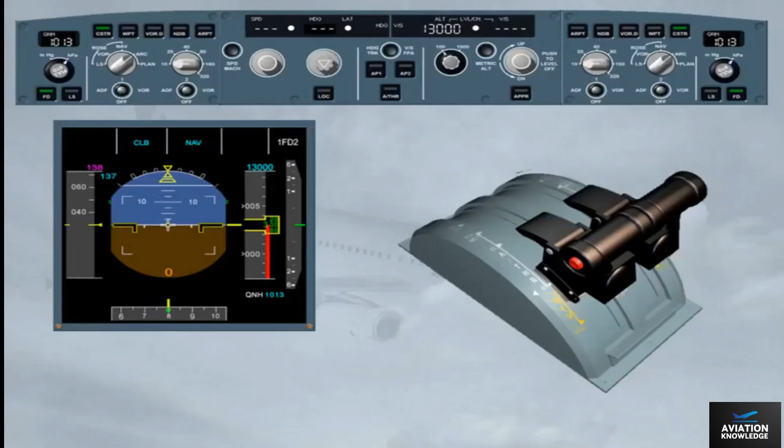We are taxiing to the runway. Because we are on the ground, the auto thrust is necessarily disconnected. This is confirmed by the absence of any auto thrust related indications on the FMA and by the extinguished auto thrust push button on the FCU. Thrust is manually adjusted by the crew as required to taxi the aircraft.

You are cleared for takeoff. The pilot flying must manually set the thrust levers to flex or toga to initiate the takeoff roll. Click on the thrust levers to initiate the takeoff roll.

As soon as the thrust levers are set in the toga position, the FMA shows auto thrust in blue, indicating that auto thrust is armed, and manual toga in white, indicating that the pilot manually controls the thrust via the thrust levers set in toga.

Note: TOGA is the maximum thrust available for takeoff.

At the same time, on the FCU, the auto thrust push button light illuminates in green. The fact that the auto thrust is armed means that it is ready to be engaged by a pilot action on the thrust levers. Note that when the auto thrust is armed, the pilot has manual control on the thrust with the thrust levers.

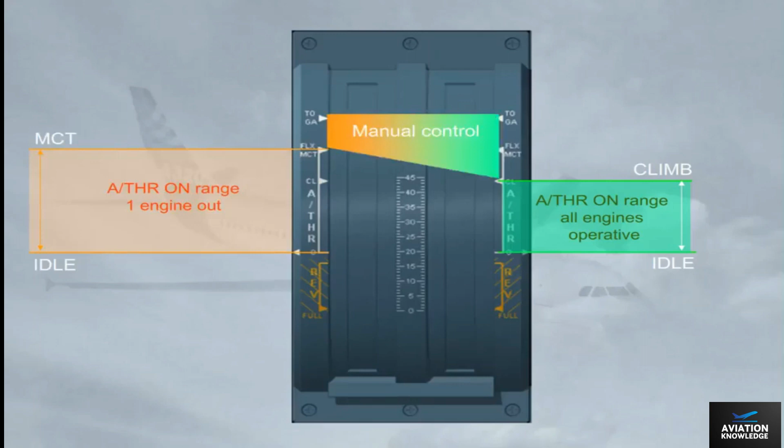When the aircraft reaches the target altitude, Autopilot Flight Director switches to altitude mode. The autothrust switches to speed, Mach mode, as indicated on the FMA. In this mode, the autothrust continuously adjusts the thrust to maintain the target speed, Mach.

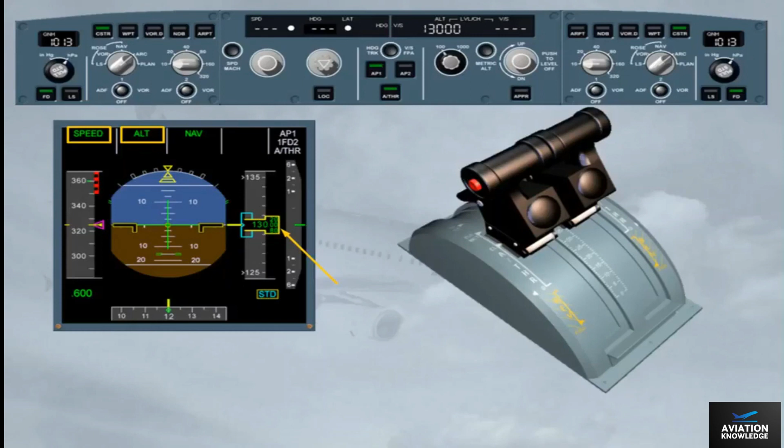Autothrust is also in speed mode when Autopilot Flight Director vertical modes are vertical speed or flight path angle, GS, and generally during the approach.

We are now in approach, just before flare. You fly the aircraft manually with the autothrust engaged. Note that the autothrust is in speed mode.

During a hand-flown flare, the pilot has to reduce the thrust for landing. He will do so by bringing the thrust levers back to idle, at about 20 feet. Note, if he does not do so, the auto thrust will increase thrust to maintain the speed. A retard auto call-out comes up at about 20 feet as a reminder to retard the thrust levers.

Thrust levers are now set to idle. This turns the auto thrust off. Note that on the FMA, the white auto thrust indication is no longer displayed. The FMA auto thrust column is blank. On the FCU, the auto thrust push button is now extinguished.

We have just seen how to turn the auto thrust off by setting the thrust levers back to idle for landing. The recommended procedure to set the auto thrust off in flight, in order to avoid any thrust change at auto thrust disconnection, is as follows: 1.

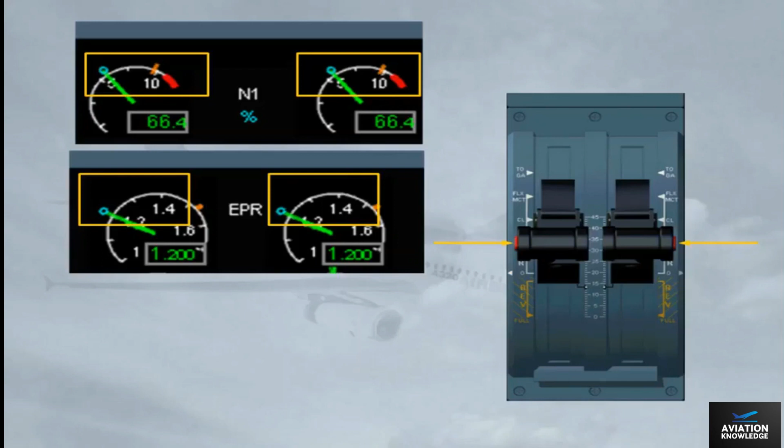Note: pressing at least one push button for more than 15 seconds will inhibit the auto thrust, including alpha floor protection, for the remainder of the flight.

When the auto thrust is off during flight, in order to turn it on again, press the auto thrust push button on the FCU, with the thrust levers in or below climb detent.

Note: you can disconnect the auto thrust by pressing the auto thrust push button on the FCU. This is not the standard recommended procedure.